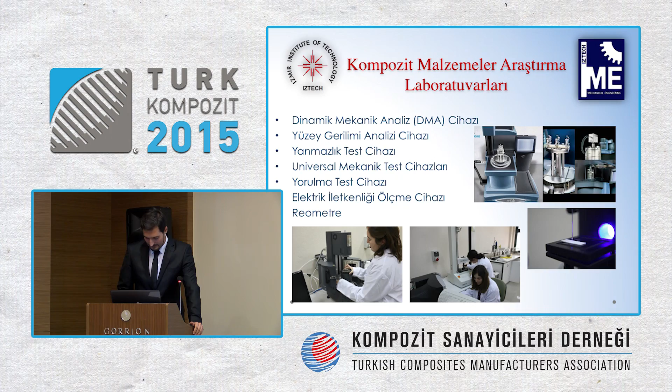Bertan informed you about that, but I also would like to inform you shortly; the devices and the production techniques have been enhanced. We have a lab discovering many techniques, and we used the infrastructure of this lab, and I feel really lucky to work in such a place.

The content of my presentation: of course, radar and radar absorbing will be touched on, and then radar absorbing materials and structures will be mentioned. The literature, what are the studies in the literature, and in addition to the studies in the literature, what is our motivation? Why did we launch such a study? Our targets, experimental studies, results, and assessments.

What is radar? Radio detection and ranging. It's shortened to radar, and it was first used during the Second World War by Americans. So high-frequency radio waves are used to detect the position, speed, and the shape of the good or a particle. You can see it in the animation below.

We send an electromagnetic wave, and it is just reflected, and its reflection differs according to the speed, the size, the shape and position of the item, and we can detect everything thanks to the radar system.

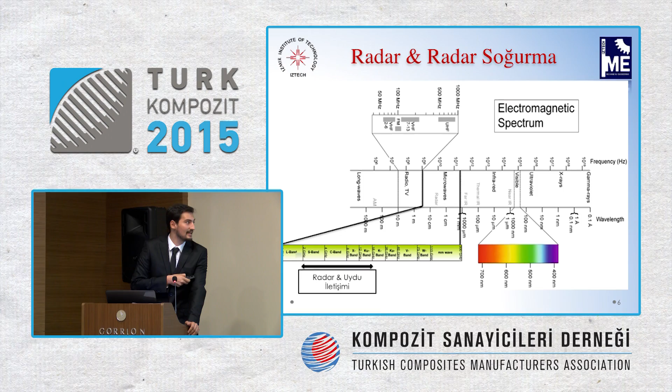the area that we mention is around 10 to the power of 9 or 10 to the power of 11. Microwaves are divided into bands, and we work on 2 to 18 gigahertz. S, C, X, Ku bands are the bands that we are working on, I can say.

Compared to the regular aircraft, these aircraft have very few edges, because in geometry, if the radar touches those edges, it reflects back to any places, and you can get detected. In order to minimize that, geometry is to be flawless. Of course, there are certain limits, because you're a vehicle physically there; you cannot just disappear. This is where you need the absorption material.

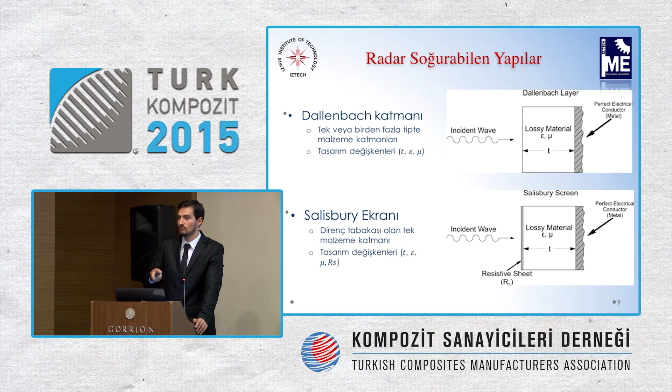And another developed absorber is Jaumann absorbers. They have additional resistances and the number of layers increases. What does that enable? I would like to share a graphic with you. Well, this is the frequency on the bottom line.

The radar frequencies are used from 0 to 20, and this is the reflected power. It's a decibel logarithmic graphic. 10 decibels equals 90% of loss, and 20 equals 99% of loss. And if a single sheet is used, you see how much loss is achieved.

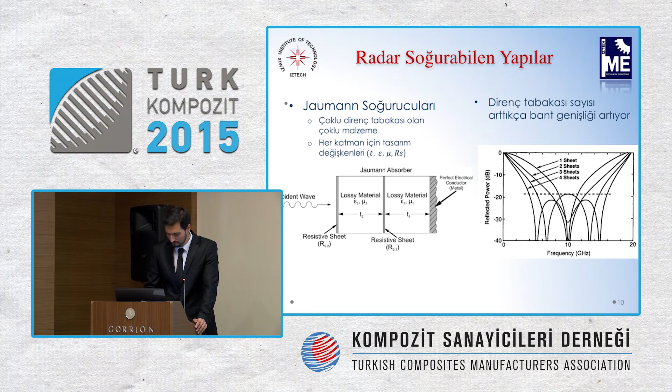If we achieve 20, we can only have a short bandwidth, and the absorption will only occur at that bandwidth. But as the number of resistive sheets and layers increases, the 20 decibel bandwidth increases incredibly, and this was one of the targets of the project.

The literature, studies in the literature. There are two studies that I would like to mention here.

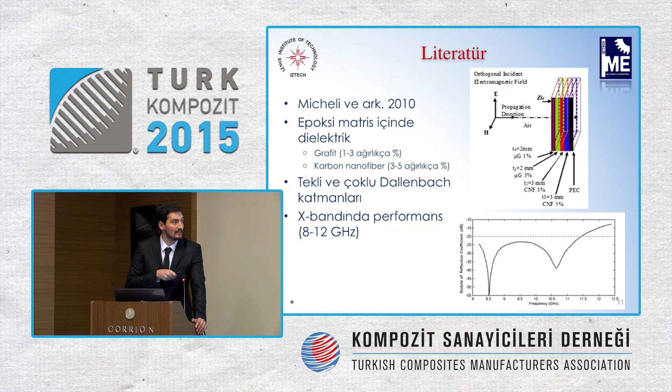Micheli et al. conducted a study, and within an epoxy matrix they put the dielectric material. Graphite and carbon nanofibers are used at different levels, and they are put on top of each other, like a series, and at different percentages, different materials are used to enlarge the bandwidth, and this is enabled.

Another study includes the resistive sheet on PET film. A very thin metal coating is done for resistance, and a polycarbonate structure is integrated with that. And it has a different frequency interval from 40 to 70, and it enables an important absorption.

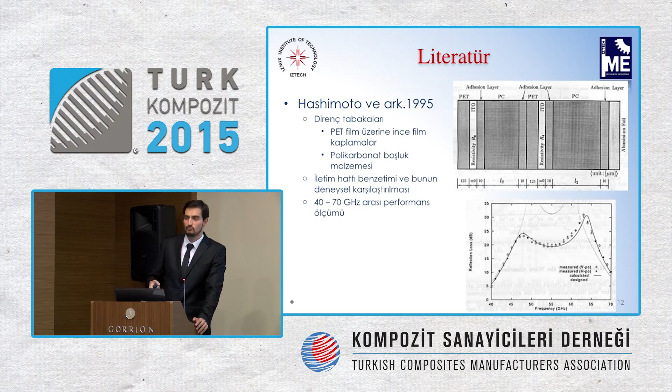These are already done. And why are we doing it? Because these studies have been especially on radar absorption. But what do we want here? The materials that we produce should be functional as well. We want them to carry a load. Here, composite materials are on the stage. Let me explain our motivations.

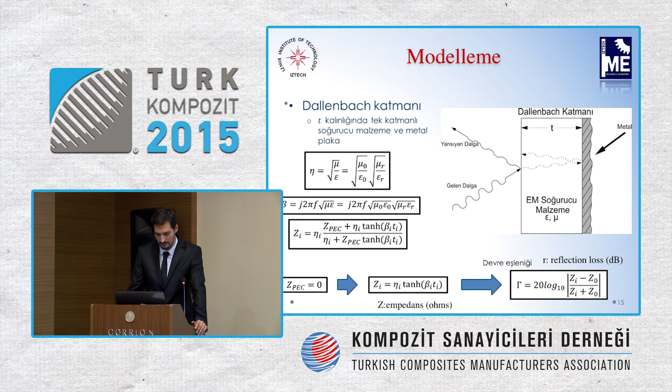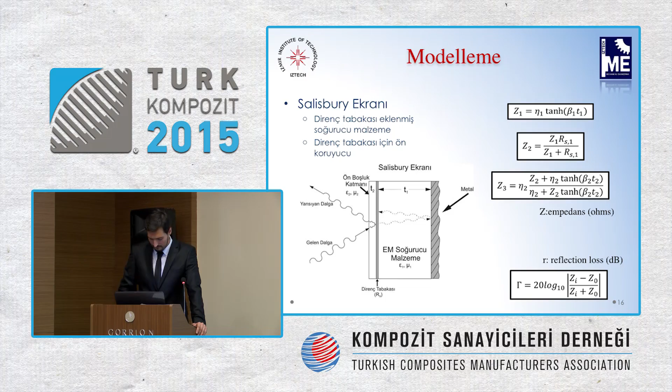Salisbury screen: there is a tiny modification here, because we have to get closer to reality. We have continuously reinforced composites, and on the outer part, we have an epoxy layer. It's not a full resistance, and epoxy has our filling material. Therefore, we have a front gap layer instead of the resistance layer, and it is thick to a certain point. These are variables of the design, and we put them in the genetic algorithm.

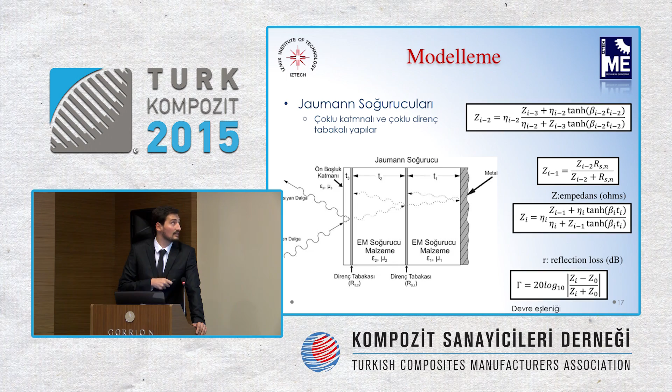Jaumann absorber: the number of the resistive sheets increased here, and we used all of this in genetic algorithm optimization, and we have a front gap layer.

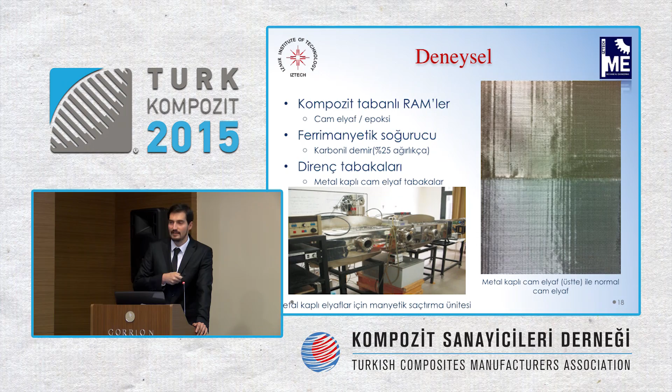Looking at the experimental studies, the composite based radar absorbing materials are either glass fiber or epoxy. For ferrimagnetic absorbers, 25% of them are carbonyl iron, and for resistive layers we have metal coated glass fiber layers. And here you can see the regular glass fiber and metal coated glass fiber. Well, it's 10 to 15 nanometers, and it's not quite visible by the naked eye. Here the magnetic sputtering can be done.

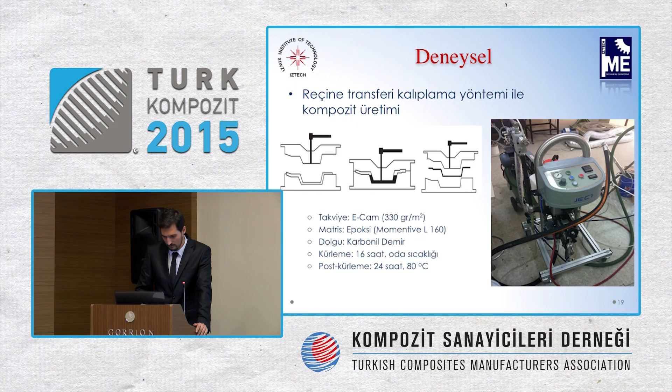We pressurize the material in a closed mold, and we produce the desired model. As I said, I use glass as a reinforcement. As matrix, epoxy is used, and its Momentive L160. As a filler, we use carbonyl iron. It has been cured at room temperature for 16 hours, and post-cured 24 hours at 80 degrees Celsius.

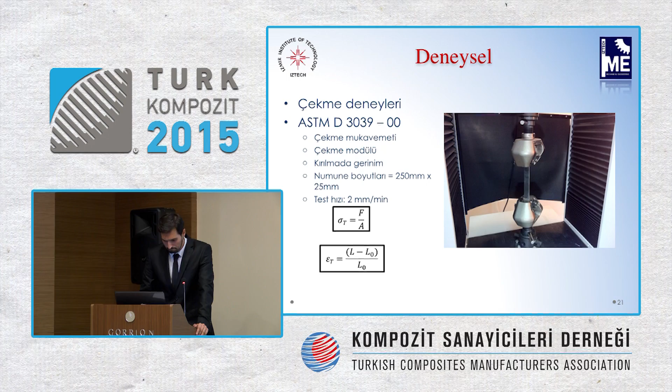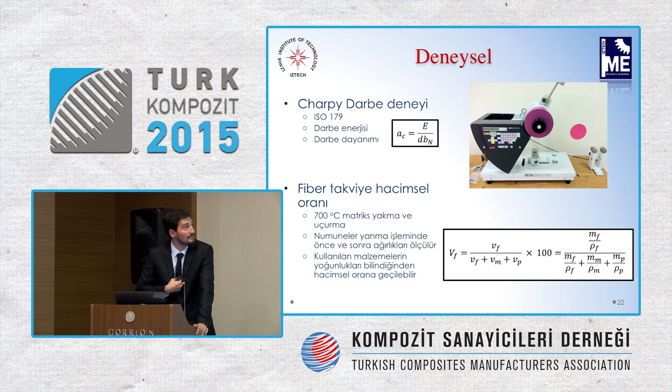Experimental studies for mechanical properties. Of course, we had mechanical studies; not only pulling but pushing tests have been done. The breaking, fracture and cracking tests have been done as well. The tests fit the standards, and at the same time, impact endurance tests have been realized, and fiber reinforcement volume rates have been detected.

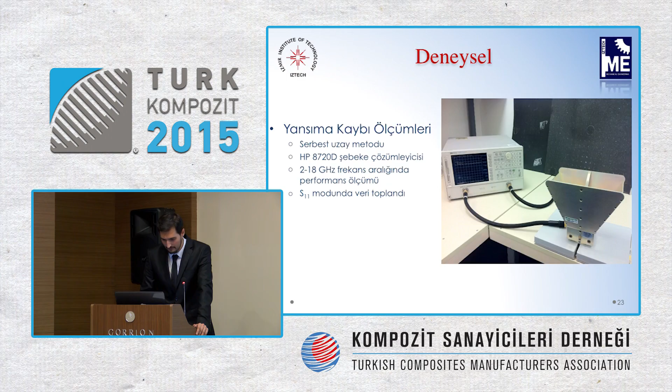Measurement of loss of reflection. We have the network analyzer here. We have the antenna, and it was done between 2 to 18 gigahertz frequencies.

Results. Let me talk about the structures. We have 5 structures, and the number of layers is 8 in all of them. The configuration can be seen here, and you can see the resistive sheet. The fibers are here, and the mid-plane is symmetrical. The first one is a reference sample. There is no add-on, no additives.

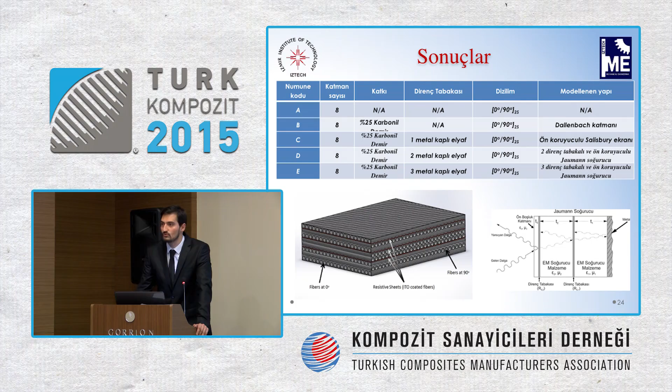On B, we have carbonyl iron, and it is equaling the Dallenbach layer. On C, it's carbonyl iron, and we have 1 metal coated fiber. On D, there are 2 metal coated fibers, and on E, there are 3 metal coated fibers.

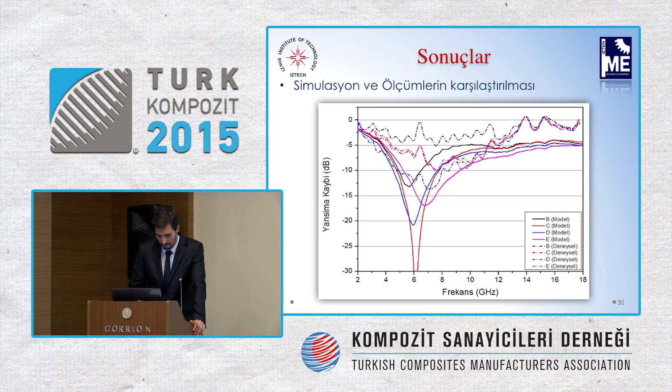But before that, after the first part, we had Mutlu work on that. We increased the number of layers. It was 8 normally, but we increased the number of layers to 16. We use epoxy again, and he added other resistive layers. I used 3 and he used 4 maximum. Our fillers are 25%, the same for both of us, and the modeling is similar.

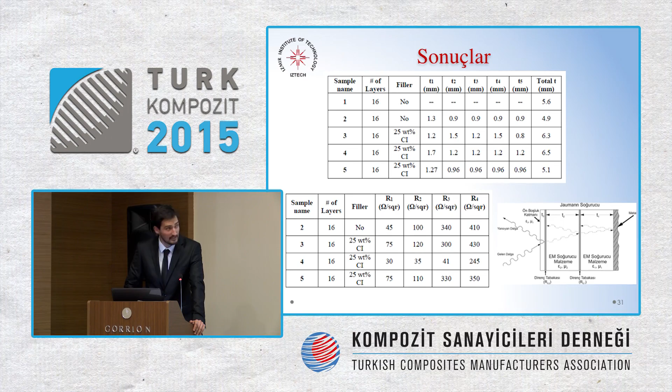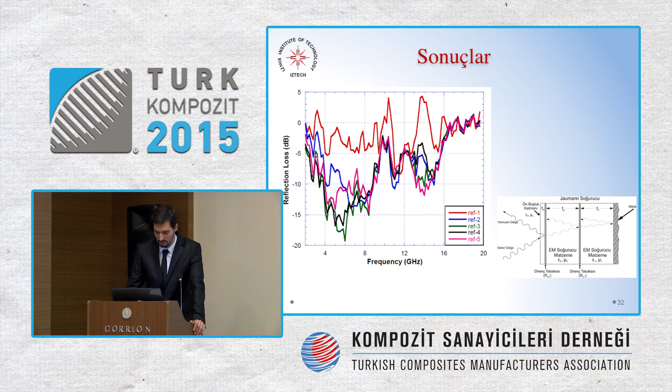The result. At first, 15 decibels was not possible to see, but later we have 20 decibels. Why? Because of the thickness. Thicknesses were very finely tuned. But of course there are differences between models and experimental studies.

Why? Because with models we think of our layer as a continuous material, but on unidirectional fibers it might be continuous at 0 degrees, but at 90 degrees they are not continuous. This might be the reason. Microstructures are not distributed in a homogeneous fashion because they have a different density. Therefore, different particle sizes might be required, or a different modification might be used.

The resistance layers' distances between each other have to be similar. They have to be equal. And lastly, the metal plate on the last part should be perfectly adhered. Sometimes there might be gaps, and this will have an impact on the result.

As a result, radar wave absorbing materials and structures have been created, and metal coated fibers and carbonyl iron have been used to absorb the radar wave. The resistive layers were added and bandwidth is increased thanks to that. The additives have an impact on mechanical properties, and there are differences between simulation and measurement, and I explained why.